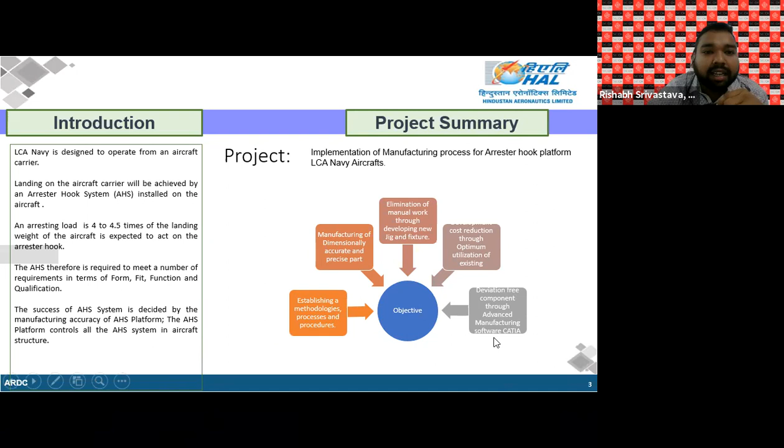Sir, I guess we'll have to continue, otherwise we'll lose on time. Yes, that's true, you can continue, sir.

Okay, sir. We have taken some objectives during that project, but methodology we have established without this, as there was no methodology available.

Next, manufactured parts should be dimensionally accurate, because when landing the aircraft on the aircraft carrier, the accuracy should be good. Then elimination of manual work through use of our automatic systems and CNC machines. Then utilization of existing sources, because developing a new product or new technology costs the company very high, so we have to utilize existing sources.

First is the utilization of CATIA V5 software, which has fully advanced facility.

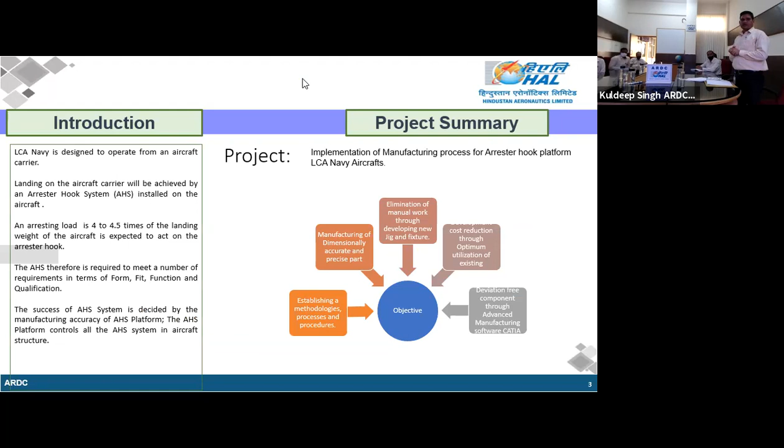Then we adapted a methodology: when we got the design and drawing from the designer, we studied the design and the part model. Then we decided the billet size required for that part is 165 mm thickness.

Then selection of machines and tools. The machine we selected based on availability is the BOKO-5 CNC machine, with specification of 2.4 meter by 1.7 into 1200, which has the facility of plus minus 90 degree.

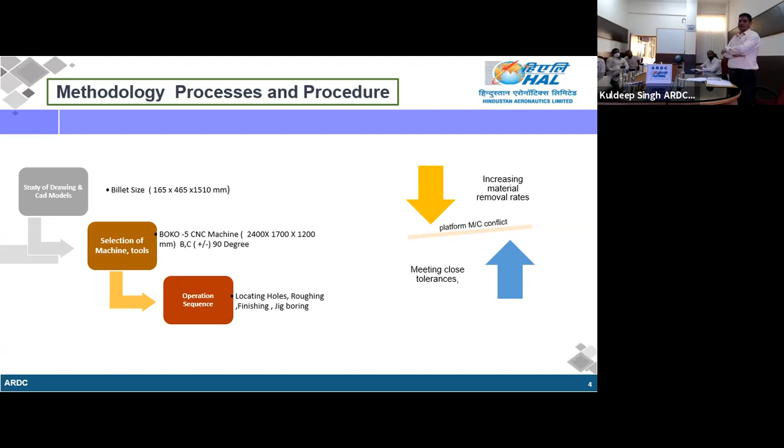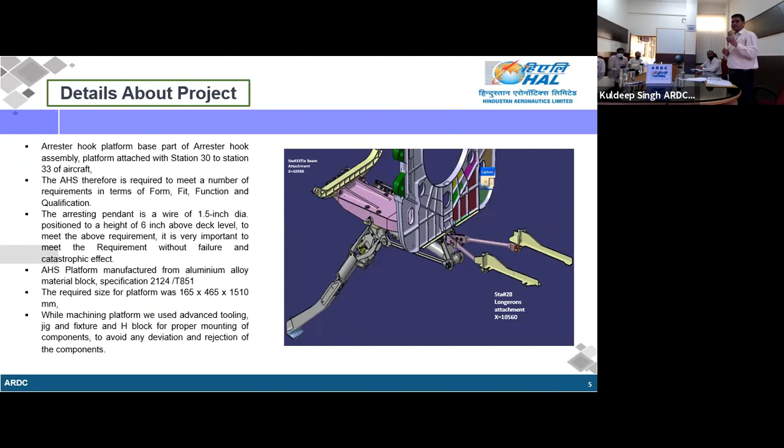As we know, the arrestor system is in line between station 30 to 33, and it engages with the tie rod with the aircraft positioning. Over that station, the total load comes onto the platform. It has a linkage of 45 assemblies and sub-assemblies of the aircraft.

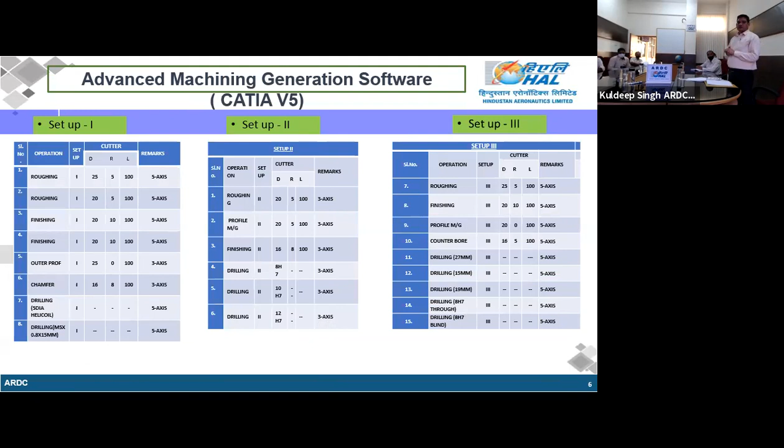So for adapting that, we have made 3 setups for manufacturing of this assembly: setup 1, setup 2, and setup 3. We have predetermined the operations required for different tools and cutter diameters. We have taken the roughing operation, finishing operation, drilling, and outer profile. Because the thickness of the component was 165 mm, it required the use of a specific size of length cutter.

Now the innovative aspect and improvement we have taken, as earlier told, is we used CATIA V5 software. We have the advanced facility of manufacturing tool path generation.

This is the first time we are going to make it at a thickness of 145 mm, scooping out material and directly converting a 200 kg part into a 50 kg part. Scooping out material involves a lot of scooping, so we needed some advanced approach because so many times we changed the program and the tool.

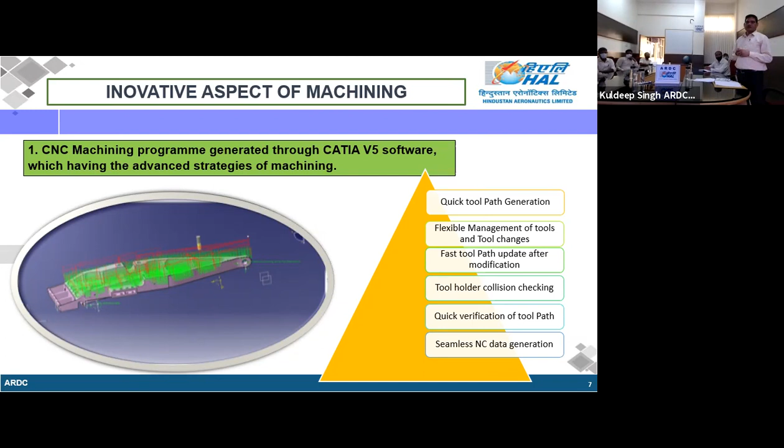It was CATIA V5 software we used for manufacturing that programming. We have the advanced feature. So that mainly faces a lot of challenges for manufacturing this part.

Earlier we planned for making the material billet thickness at 165 mm, but due to unavailability of material and material constraints, we went for 145 mm. The advantage of making it at 165 mm is that scooping out the material, having a parallel surface to the bed.

When warpage is created due to the warpage and vibration, we are unable to achieve the thickness. So then we had to go with 145 mm thickness of material.

In that case, we adopted the constant angle machining strategy. Due to unavailability of 165 mm thickness material, we planned and manufactured this part with 145 mm material. For making the 145 mm material thickness, the constant angle is set where all the program runs on multiaxis.

In the multiaxis program, there are chances of creating more warpage deviation in the parts. As we have shown, the position when running a multiaxis program has the tool and block position inclined at 15 degrees. So the speed and proper parameters are required for manufacturing that part.

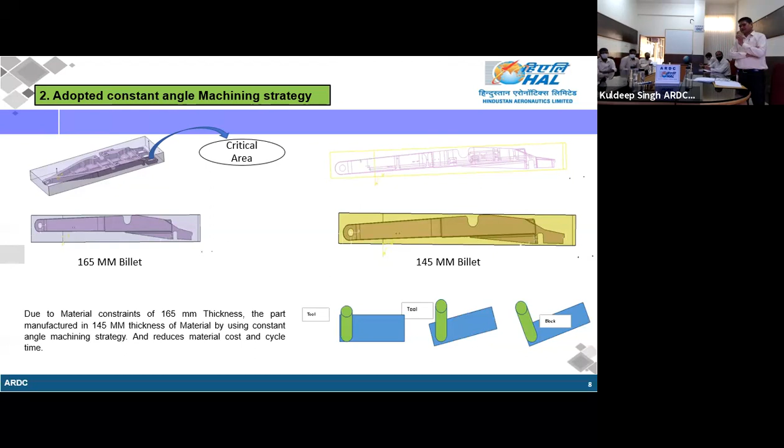While doing that machining, we successfully completed and demonstrated that part. Now, the second improvement: we have gone for development of a new jig and fixture.

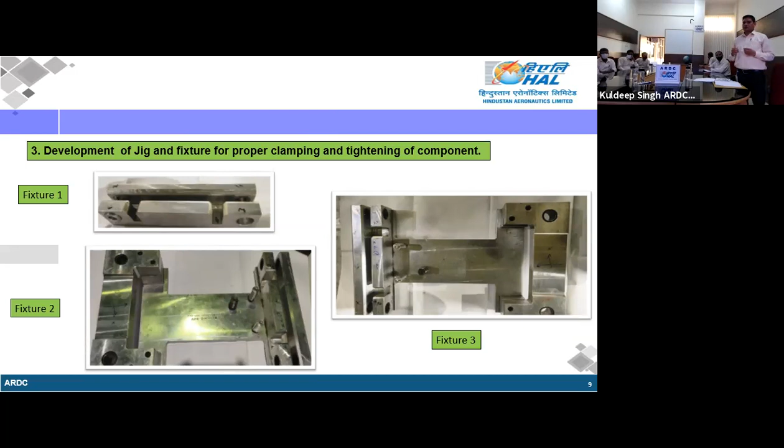During the machining, we faced a lot of challenges. First, due to the lack of material, there were issues in the orientation of the program component and the grain direction.

With consideration of all these conditions satisfied, we proceeded. The second challenge we faced was holding and clamping, tool cutter length, warpage, and maintaining perpendicularity and linearity, which were big challenges for us.

That part is fully certified by the government process; we took it into consideration from raw material to final stage with CRI or RCMA clearance.

So we got the tangible and intangible benefit: we saved material cost of approximately 32,000 for one part, and through designing the new jig and fixture, it saved a cost of 5,20,000. So in total, we saved 5,51,000 in cost for manufacturing one part, considering this part is still under the design and development stage.

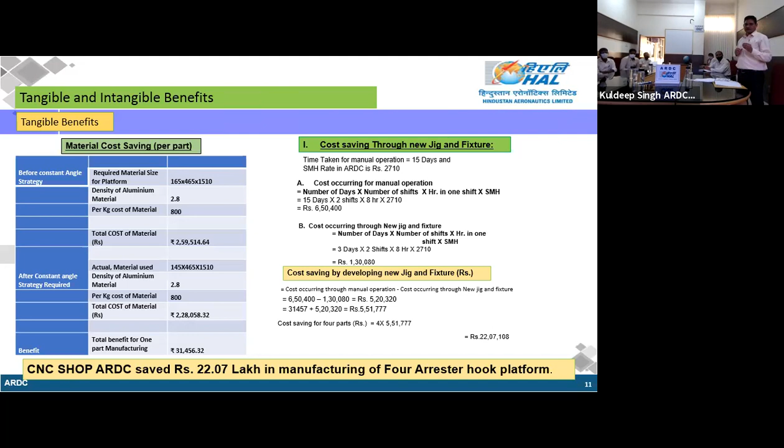So we have manufactured only 4 parts till now for the naval prototype - 1, 2, and 5 - and 1 for testing STS, that is structural test specification. Total cost we are saving is 22 lakhs for manufacturing that 4 parts in the CNC shop of ARDC.

A second intangible benefit we got is technology innovation, because this is a new, first kind of technology we invented and manufactured in our shop. Second, patent - this patent we can go for in future for licensing to outside agencies based on management decision. It will show our enhanced capability and capacity as an organization, and it is creating new business opportunity in the market.

Next, it extends to the nation. As we know, our government policy - Make in India and Atmanirbhar - it is supported by these two policies of the Government of India, in indigenization. India is now the 4th country with the capability and capacity for landing on aircraft carriers. So it is fulfilling and extending to the nation. This technology can be implemented in the AMCA aircraft, the future LCA Mark II aircraft, and we are going for the LCA Navy versions. So it fully extends to the nation, the organization, and the department as well. Now I am going to conclusion.

This technology has been fully demonstrated on aircraft carriers and the arrestor system, creating a new market, and the arrestor system technology can be demonstrated and tested on the aircraft. Next, design and development of the new arrestor system will create a monopoly in the market, extending the organization. HAL has the caliber and capacity to develop, manufacture, and demonstrate new technology in the aerospace sector to compete with new aerospace entrants.

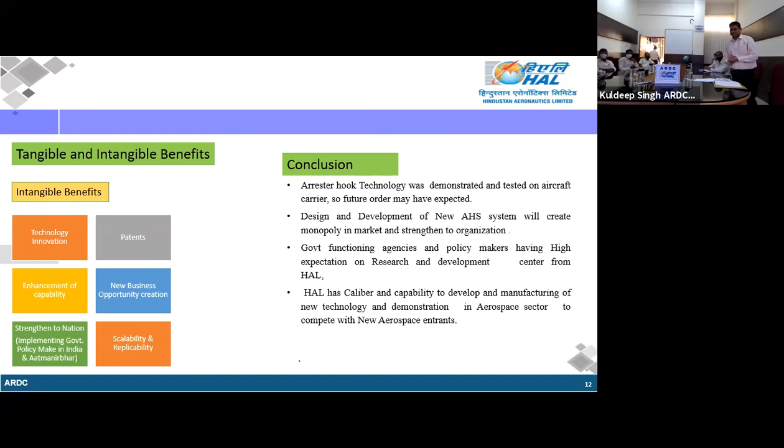I have a question - I want to know, was this decision of bringing down to 145 mm thickness out of compulsion, or was it a desired decision because of non-availability of material? Was it compulsion or desired? Yes sir, this is due to non-availability of materials - that part was planned, so it was by compulsion. I would say it was by compulsion. Right, the material was not available, so you had to go for this. Yes, so we have changed the full manufacturing strategy itself.

Okay, now when did you finalize this entire technology? How old is this? That 4 parts we manufactured, sir, recently in January - that 4 parts we completed. And fully, this technology - when was it actually validated? It was validated when the ski jump was completed on the aircraft carrier. Was it 1 year old validation, or is it just recently that this technology has been validated? 1 year old, sir, 1 year old. But finally, one part we recently manufactured and finalized.

Until now, were these arrestor hooks being imported, or were they still being manufactured in India at 165 mm? No, now we are manufacturing all parts in 145 mm - this is first manufactured in India itself. Earlier was it imported? Yes. And earlier there was no technology, sir, for the arrestor system - we were buying the full aircraft from outside. So now for LCA aircraft, the full aircraft along with the arrestor system technology is demonstrated in manufacturing.